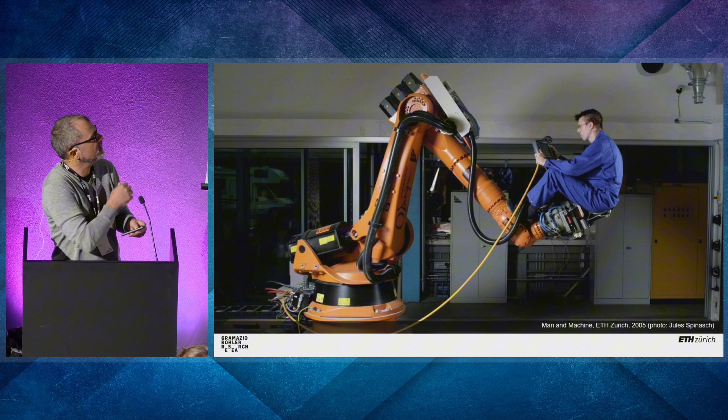Let me start with this slide. This is an artist image, a staged image by a friend of ours, Jules Spinasch. It's showing an industrial robot, so a common machine you use to produce cars, mainly, but also many other things. With a human, and the human is not just a random human, it's our first employee at ETH almost 20 years ago. The image is staged in a way that you should never show to an industry person, because this is a thing you shouldn't do.

You know, this machine on the picture is extremely blind, extremely fast, extremely big and strong and unpredictable. So this is a deadly setup. But we like the image, and we're using it over and over again because it shows a thing that is fundamental to our thinking, and it's the relationship between humans and machines. So this deeply intertwined story between two ends of producing almost everything.

So you need tools if you want to produce something. Doesn't matter how complex or how technological what you are trying to achieve is. But at the same time, this story is also extremely problematic, because often we relate to machines in general and robots specifically in a competitive way. So we see our position in the world, our revenue, our existence endangered by this other species. While this shouldn't be like this. It hasn't been like this since ever. It's a thing that came up with the Industrial Revolution.

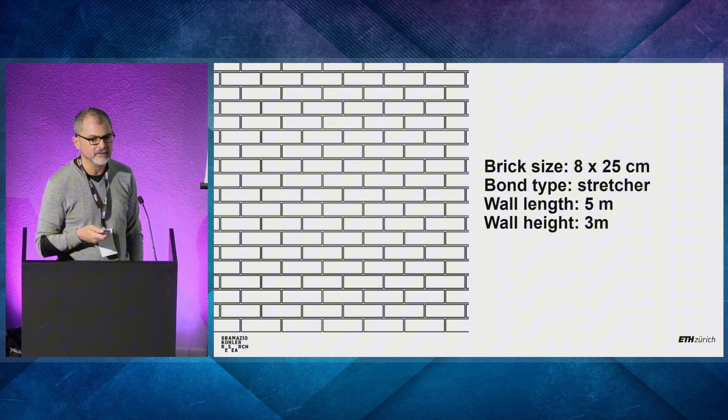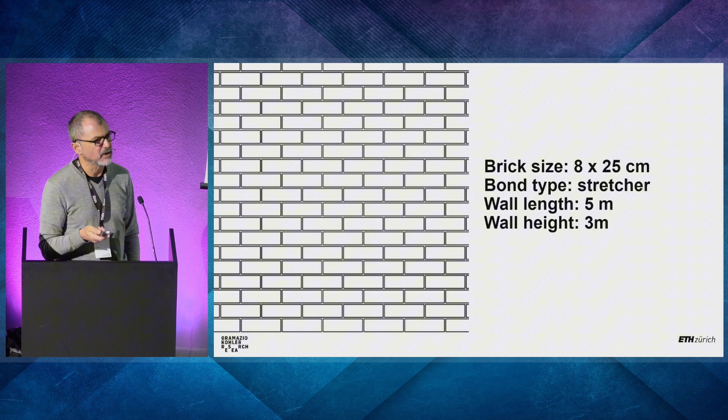It's not just a random pattern, it's a construction pattern, and it's extremely robust. So it's small, it's reduced, it's compressed, but it's robust because basically there is nothing I can do wrong. And it allows me to describe architecture with the addition of very few parameters, like the height and the length of the wall, plus the type of bond I want you to use, fixes everything.

Now, if we want a machine and not a human to build a brick wall with the same simplicity and directness, we need to describe it differently, because bond is part of a language, human language. It's a thing that a machine for sure doesn't understand. A robot for sure doesn't understand, but also ChatGPT doesn't understand what a bond is. It can extrapolate, but cannot really understand it the way we do.

But there is a notation, and this is nice with this brick stuff. A notation that is identical and belongs to the realm of machines in the same way as the term bond belongs to the realm of humans, which is just two nested loops, describing again the same way the mason would perform it, what to do. So put the brick at a certain position, then put the next brick next to the last one, go on until you have reached the end of the space or an obstacle or the length I want you to do.

And then you jump back. This is the second loop or the external loop. You move up by the height of a brick and you shift by half a brick. And this does this. Now, this is a nice symmetry, identity, but it doesn't help, because we were interested in finding out what the difference would be. So when does the system change? The system changes if we add something to this small algorithm, which is banal. It's two lines, could be less.

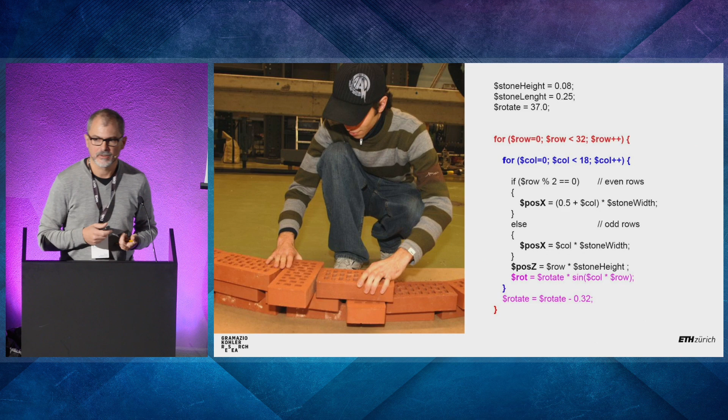We do some calculations, and now two things happen. First, there is design coming into this algorithm. Before it's not. Before it's just a convention, it's just a system. Now this person, and this only a human can do, thinks of what could I change to this constructive system? How could I manipulate it? And he decides for a rotation of these bricks. Adds these two small lines. Everything else is identical. It's just the pink stuff down there that now gets added.

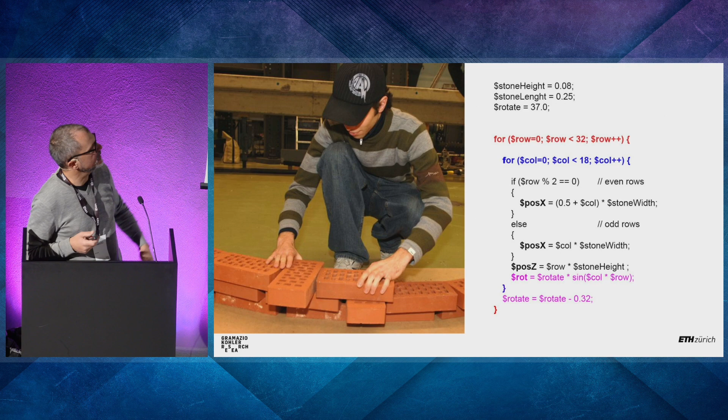And now the equation changes fundamentally, because what before was ideal for being built by a human, just the same rule repeated over and over again with the same visual reference. We are strong in putting one thing next to the other. We can be very quick, very efficient. Now, it outputs for each single brick not just the position in space, but also its rotation. And this rotation is absolutely not intuitive, because it's following an algorithm or a calculation, whatever, that is completely arbitrary. There is no way to recognize it, or to extrapolate it from the position of the last one.

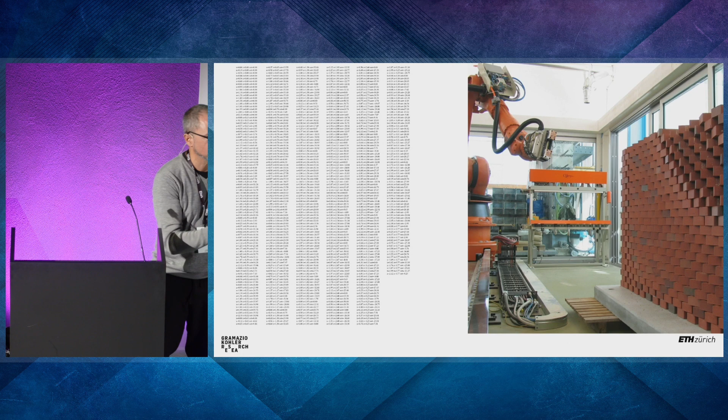And now you could say this is a very small change, but it's gigantic, because the thing that before was conceived to be built by a human now has been taken out of the domain of the human and put into the domain of the machine. At the very core of the domain of the machine, because you don't need any artificial intelligence here. It's just a controller that controls six motors that are axes. Of course, it's very high tech to have this robustly perform over years and years. But at the end, it's banal.

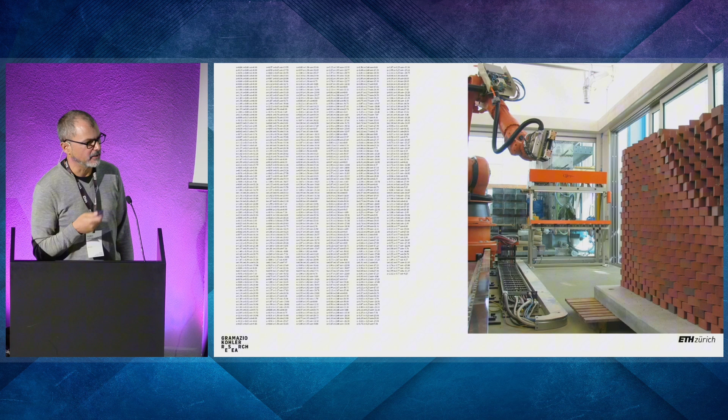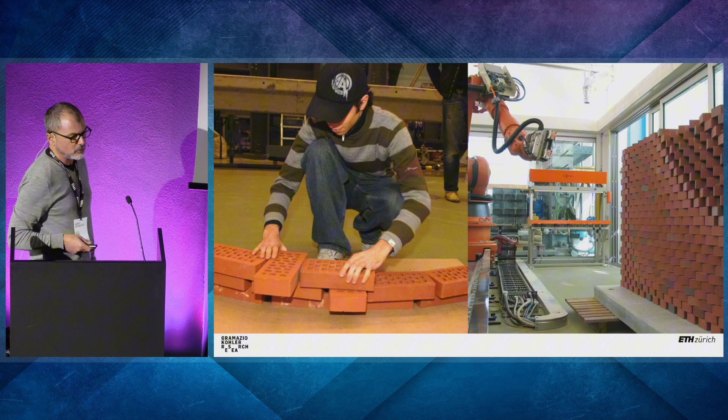But this machine has the ability to put an element in space and doesn't distinguish between simple and complex positions. So the very notion of complexity is renegotiated here. Okay, and this allows us at the end of the day, now I come to an end, to directly connect the creative act of designing, that is our human capacity, to the capacity of machines to perform complex actions in space without caring about the degree of complexity.

And this direct connection shows us two things: that suddenly this competition between the human and the machine, so that here the human is not substituting the machine, the machine is not substituting the human. They're operating in their own domain where they are strong.

Now you could say this is romantic, a bit naive. You might be right to a certain extent, but it's still worth thinking what it means, because we are doomed to interact with machines, and the longer we interact with machines, the less we are aware of it. And to understand when, in which situation, we do more. So when does 1 + 1 give 3 and not 1.5? This is very important, because it's not always obvious.

Here you see the result. This is when we probably first came up with the notion of digital materiality. That back then was a strange combination of 2 words that didn't fit together. We did it on purpose. Now, 20 years later, I sometimes read about digital materiality. I think it would be normal, an established concept. But today we will not talk about digital materiality, but more about what it does to architecture.

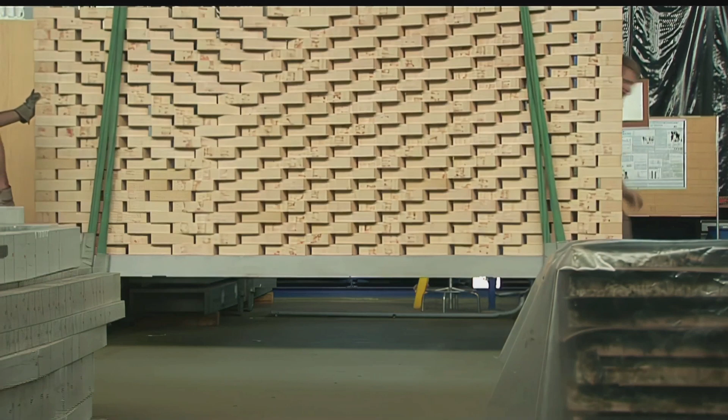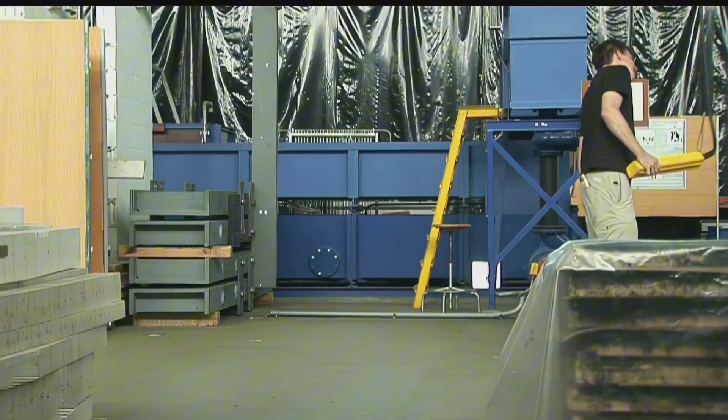So this first example allowed me to establish how we relate and think about machines, and also that this relation is part of a system. If we think of constructive systems, we stop thinking of just construction, just how parts meet in space, how we screw things together. Constructive systems are something much, much bigger that goes into questions of energy, labor, time, societal questions, who does what, when, where parts come from. And of course, machines and our ability to interact with these machines, to talk to them, and to decide who does what.

Here in this example, this was a winery we did with Andrea Deplazes as a friend, just a few months after the first experiments, where we decided to have the machine deposit the bricks and put the glue. And we're often asked, why didn't you automate the guy putting the brick on? Because we're not engineers. It might be possible, but it's not very interesting, and it wouldn't change anything in the end product.

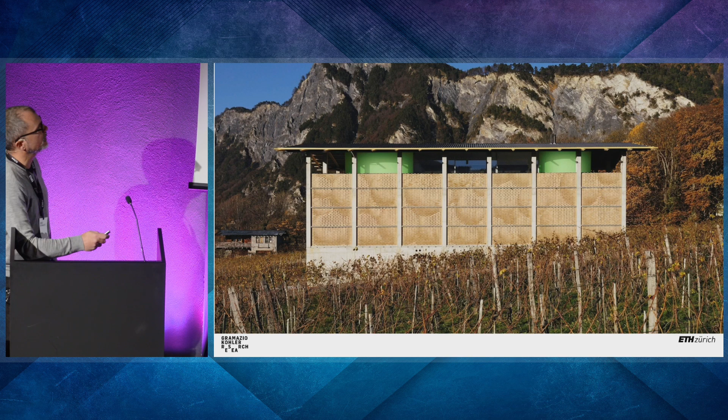Maybe I move forward here. Yeah, there you see the result. These parts are not structural. They're just screens that allow air and light to permeate. It's a winery, so that's basically what these facades should do. But they have this pattern. I cannot now explain how it was generated and the design hypothesis behind it, but I just wanted to show you how complex things become with such a simple manipulation.

You move a bit or you wait half an hour, the light condition changes, you go closer, you go inside, you're sitting and then they disappear. You couldn't say that there is one facade; there is an infinite amount of facades inscribed into this very, very simple, banal and fundamental stacking of bricks.

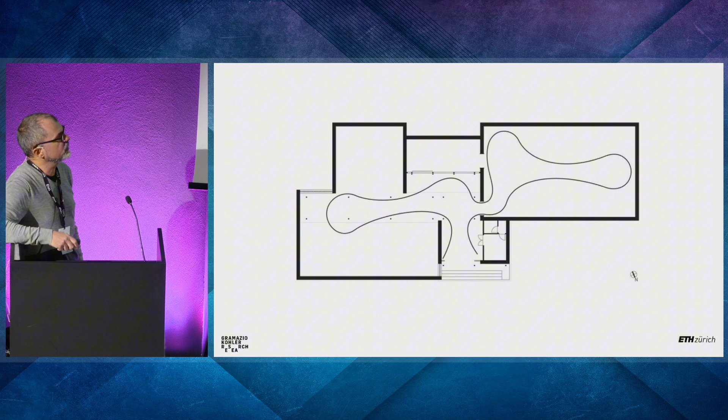Next project, this is a project I rarely show, but here it fits the constructive systems because it allows us to extend the concept of system to the design system and to this relationship between a constructive system and a design system. Here we take the robot. It's not ours, actually, we borrowed it from a company, and we brought it to the Biennale in 2008, to the Swiss pavilion. We had this machine building brick walls in front of the pavilion for a while, and then we assembled them inside to create a structure and exhibition. So basically it's exhibition design we're doing here.

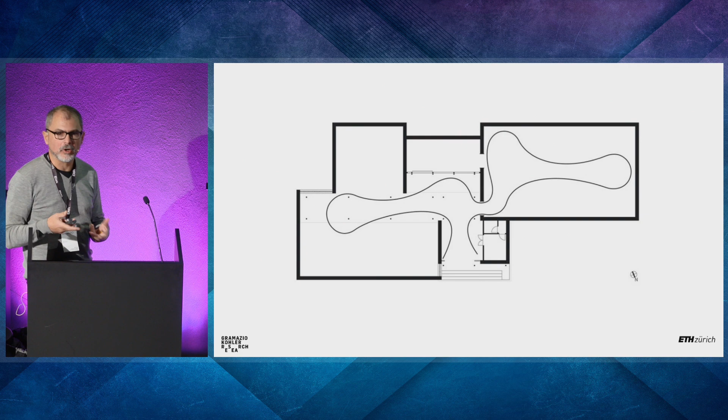And here what I want to talk about is the design approach. So we had this ability to program bricks so that the robot could then directly build them, and programmed them in a complex way, not just a stretcher bond of a few square meters, but bricks following a curve and being rotated and so on.

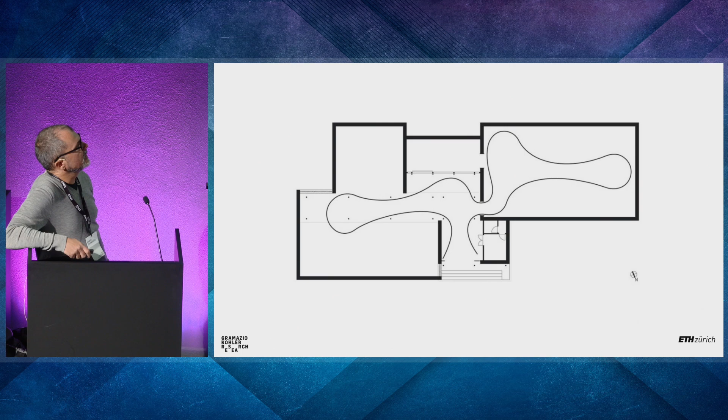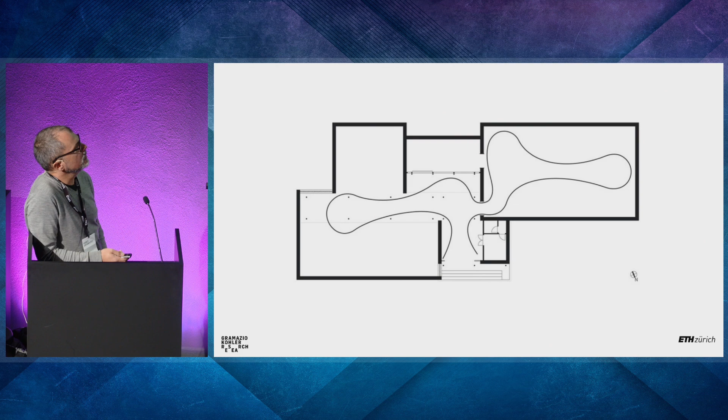And when we were asked to do this exhibition design, we decided not to design the final form, but to design a system. Because we were aware that these things need to change, to be flexible until very late, because exhibition design is like this. It's in a continuous process of transformation. So we decided to set a few rules and then to provide an algorithm.

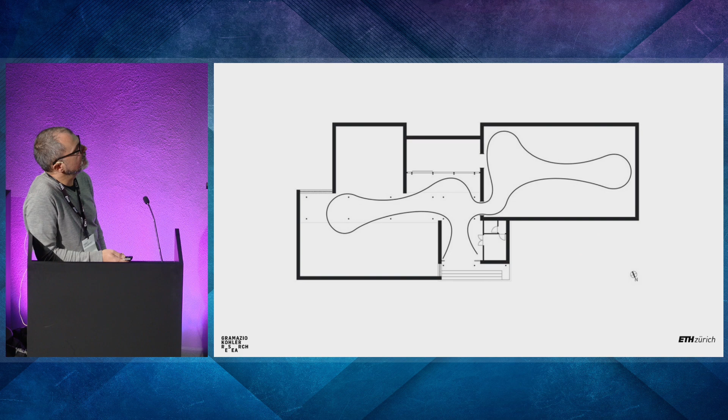The rules were we would have a wall of a certain height that we defined. It would be 100 meters long, so you could move stuff around but not make it shorter and not make it longer. So the amount of material was precisely limited. And this wall would have a behavior, and the behavior would be dictated by structure. You know, just the fact that you need to produce this wall in segments of about 3 meters, and if you don't curve the first layer, then it would just tip over.

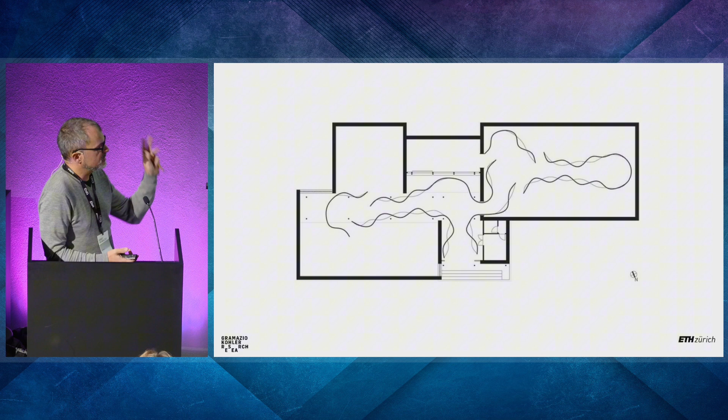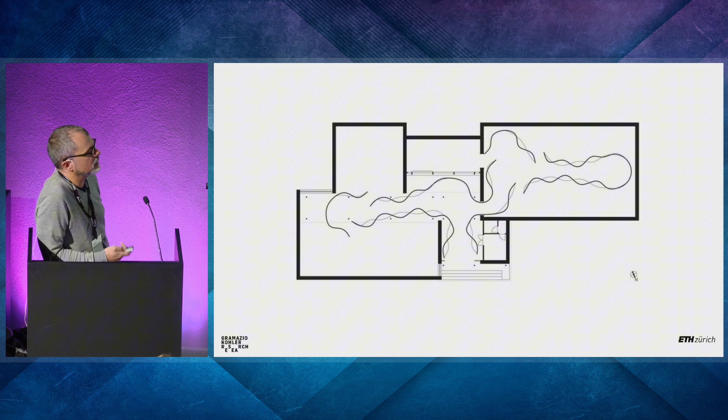And in this pavilion, or most of the pavilion, you could not drill holes and put foundations, so things have to stand. And with a certain curvature, this works. Here the black line is the first layer. So you see this thing, you move it around and it searches automatically for solutions that allow the thing to be produced. So it's, I don't know the term, in German it's Verfahrensgerechtigkeit, you know, when not just the material, but when it's the process itself that tells you how things should look at the end.

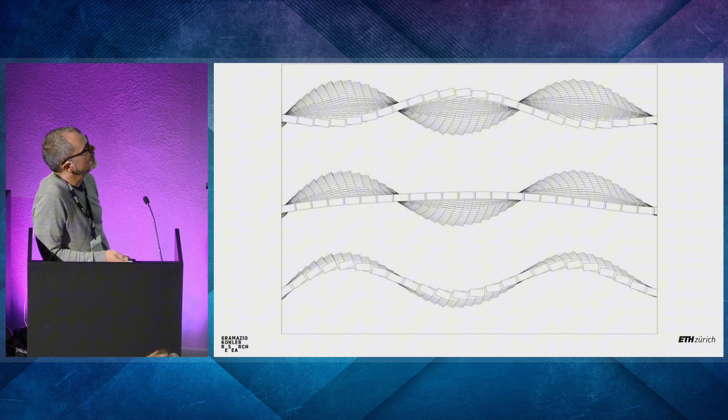And like in the other project, once you have this information, you can just ask the system to give you each single position for each single brick to make the elementation. I think that would be crazy complex. That would need weeks of manual work. Here it can be done literally in the last minute. Once you need to start producing, then the curator needs to give you the last line, and then you produce all this information, and then you are able to assemble this extremely complex, very, very thin wall directly. Good.

Another example, this is our institute building in Zurich. Here we were super lucky. This is a once in a lifetime, when the president of the school asked the faculties to design their own building. I never heard about this. Probably they wouldn't do it the second time. And inside this experiment, we designed and produced this roof here as an experiment.

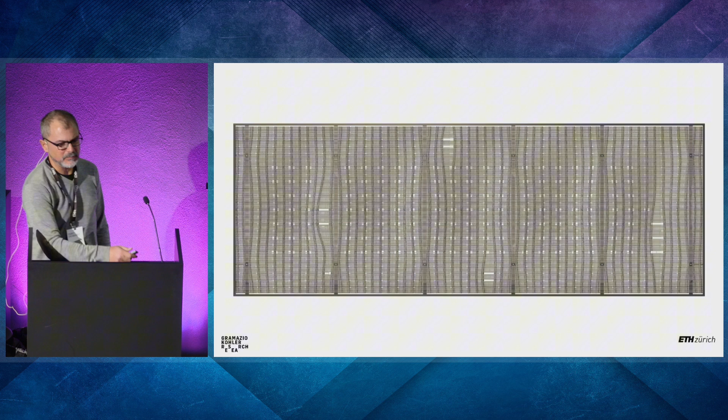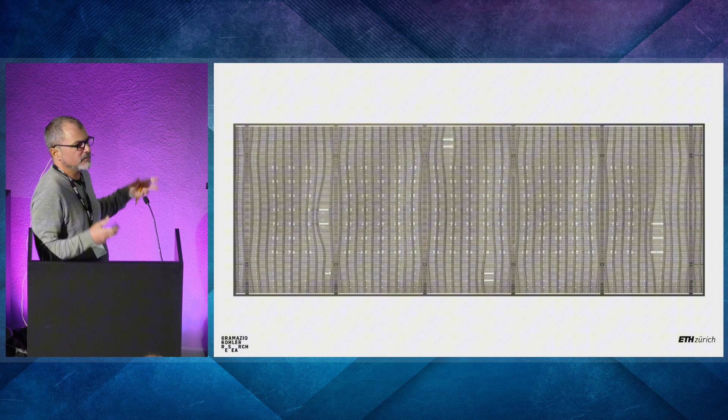The constructive system is similar to the brick experiments, similar in the sense that it's just a stacking. It's 2.5 dimensional. Different because it works with slats of timber, linear timber parts that can be processed in line. So you don't have to pre-cut them all and then find the right one to place it in the right place, but I think we'll see in a minute you do this in the process. So you have this degree of freedom to cut to a length and to cut to an angle and then to nail stuff together. And this image is nice, or plan, you could call it plan, because it's the only one existing. Everything else is data.

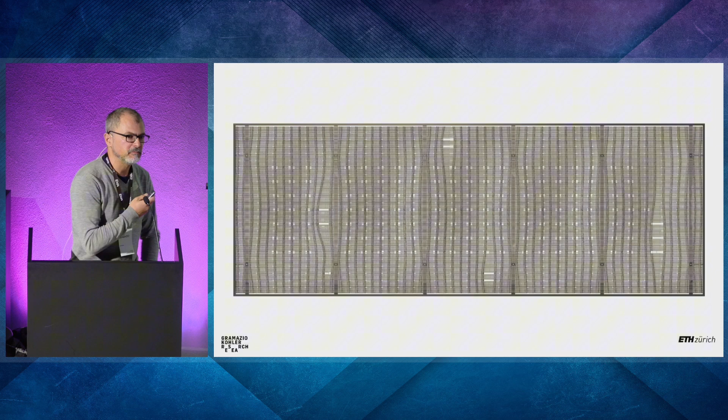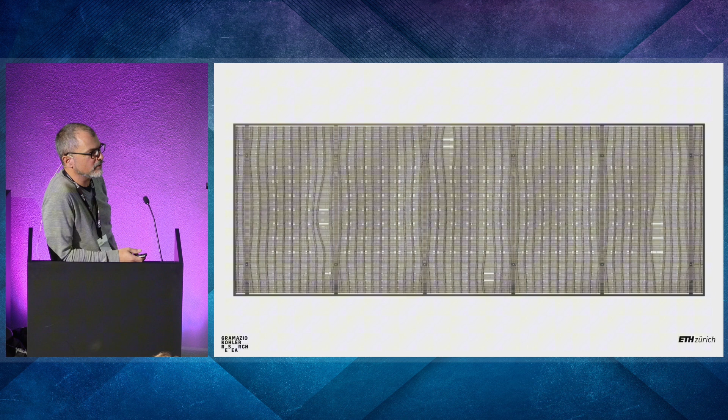It's not meant for assembly or for production, but it's meant to show a characteristic of a constructive system at this scale or of this resolution, which is that it becomes almost textile. You can stretch. You see at certain points, like here, for example, you have this opening, this smoke duct. Normally, you would cut just through your structure and then fix it somehow structurally, and then have a hanging ceiling that hides everything. And here you just ask the structure to create space for this vertical element going through.

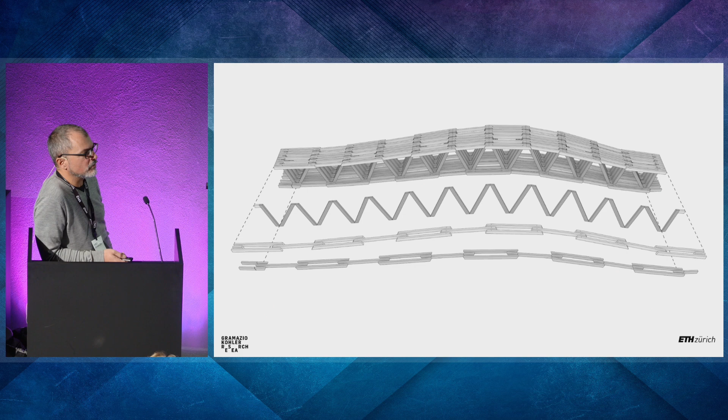The system behind is nothing new. It's just a truss, an upper chord, a lower chord, and diagonals. What is different is that these parts don't need to follow any repetitive rule, because as long as certain constraints are met, this can take any form. And the addition of such trusses creates the roof. In order to be able to do this, here I show it in a bit more explicit way, you need to design your constructive system and your design system.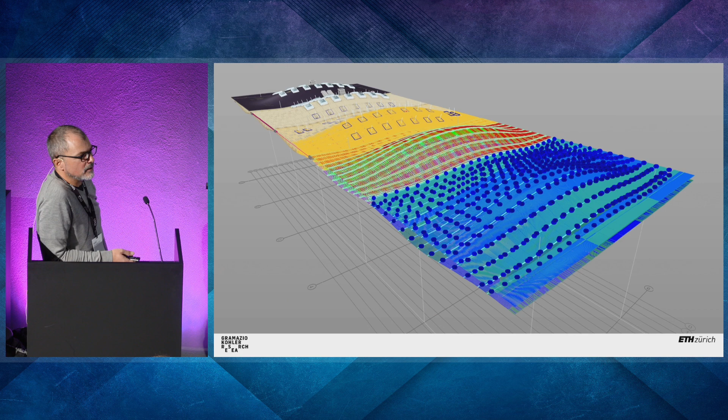So both ends are important, and they have to meet very carefully because they depend on each other. This is just a montage: here on the right bottom, you have the design information, and towards the end you have the structural information. At the end it's BIM, BIM meaning everything. But the interesting thing is, what are the interfaces we architects, who are also the designers of the system, want to be able to manipulate until the very end.

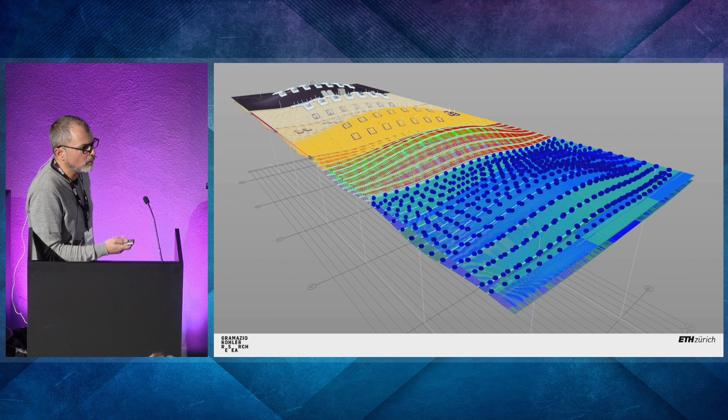So, and it doesn't matter how we design, we always need to understand what are the handles, the things we want to be able to control, because everything else then has to be automatic. This is 50,000 timber parts, all different. Almost 1 million nails, all different.

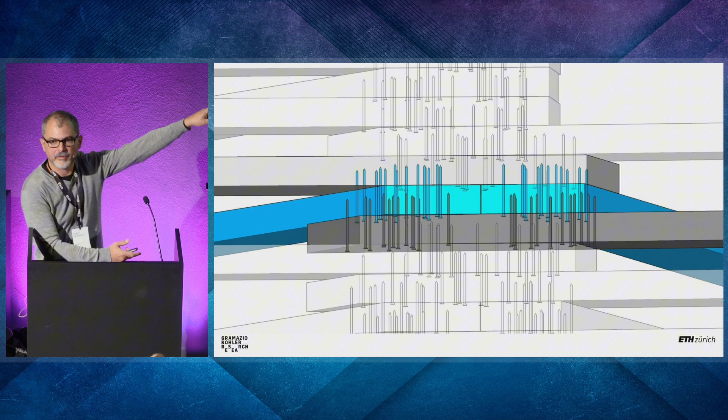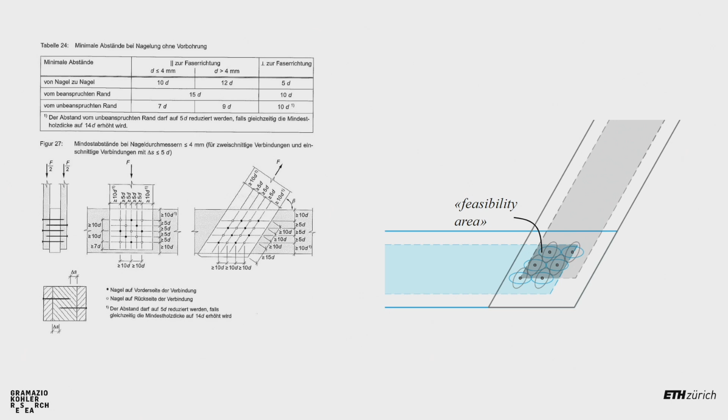And all of the nails, they're all similar, identical, but the pattern is different, because you see here it's a pretty dense thing, and you have certain rules that are dictated by timber code that you cannot negotiate and you shouldn't negotiate. And you have to find there in this feasibility area where two parts overlap the best, or let's say maybe they are often the only option to fit the nails you need, because you have this information from structural analysis, and then you start to discover in your constructive or design system certain degrees of freedom that are extremely interesting.

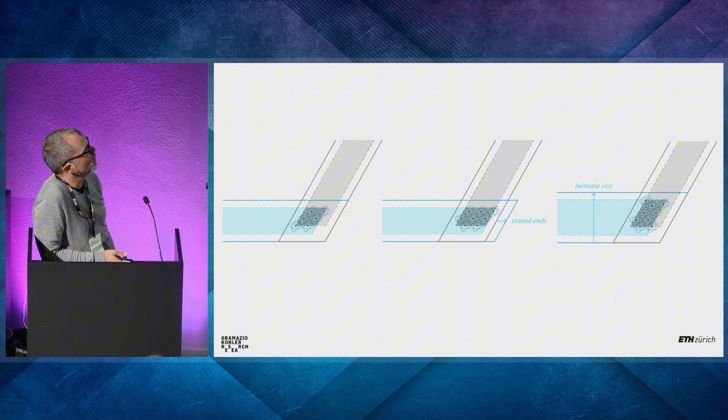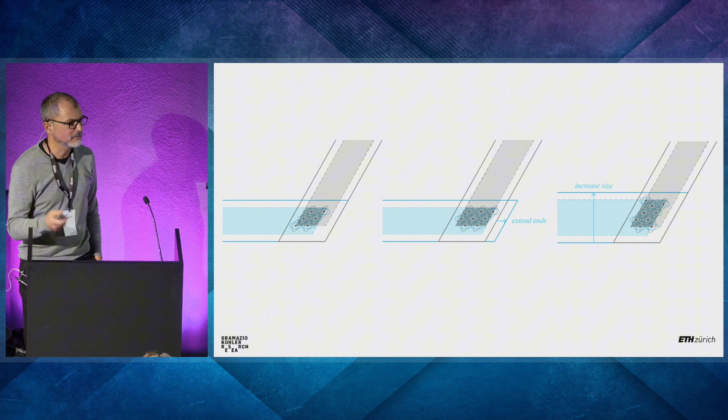So you depart from a problem. The problem being that this is 6 nails and there is no way to put the nails into these overlapping areas. But then you understand there are two ways to react. One is to extend one slat. You know, this is cheap because it comes for free. It's slightly more timber, but doesn't matter. All the rest stays identical. And this extends your area. And if this is not enough, the second thing you can do is to increase the size of the slat.

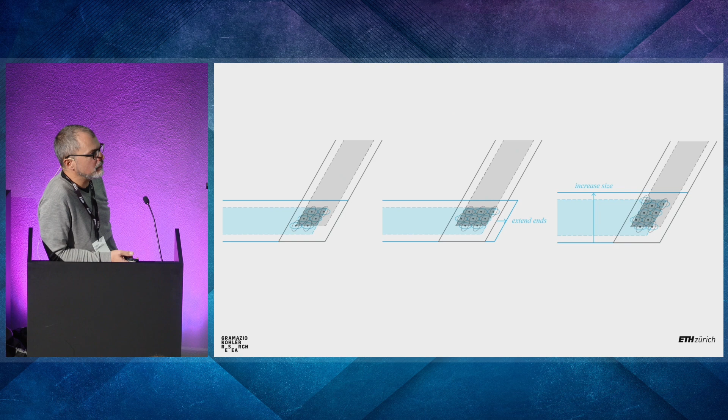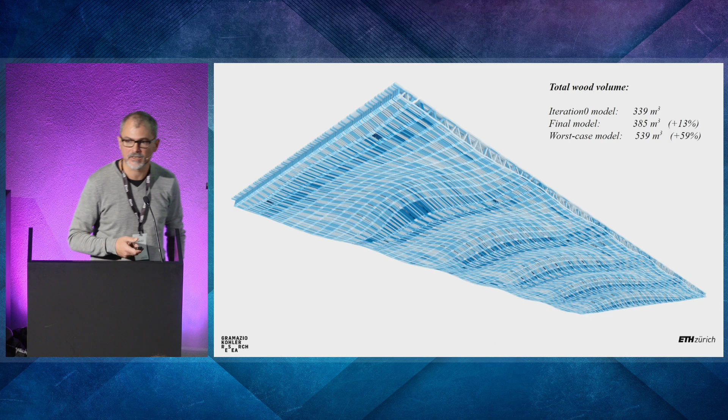And of course, this has to happen in steps because you cannot have a big number of different slats. So this becomes part of a system that then, of course, allows you to do some optimization. And optimization, you know, it's a good thing. You see there, we can save a lot by just not going for the worst case, what normally we do, because we have no idea about what's happening in our complex structures.

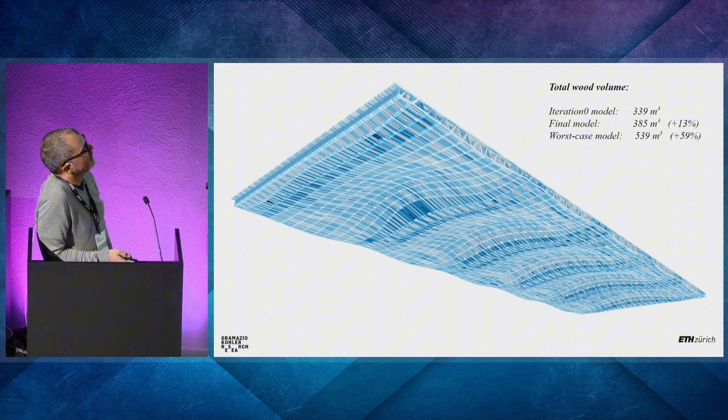Here we don't just take the worst case as a ground truth, but we say, we choose three different. Now I have skipped this slide. We just choose three different because we agree with the contractor that it is reasonable to have three different slats in the process, and then we just allocate the right one at the right place. And we'll see here.

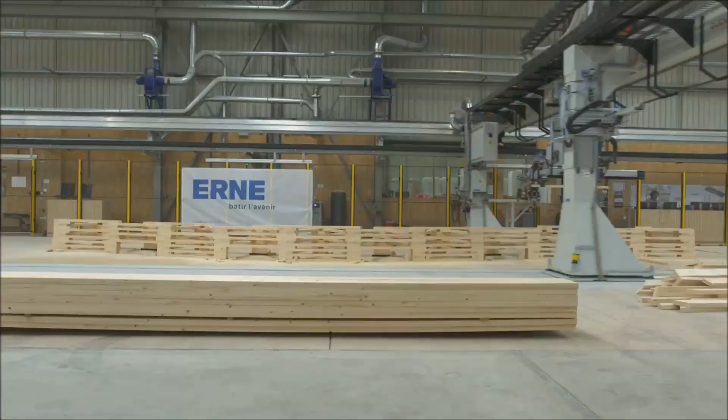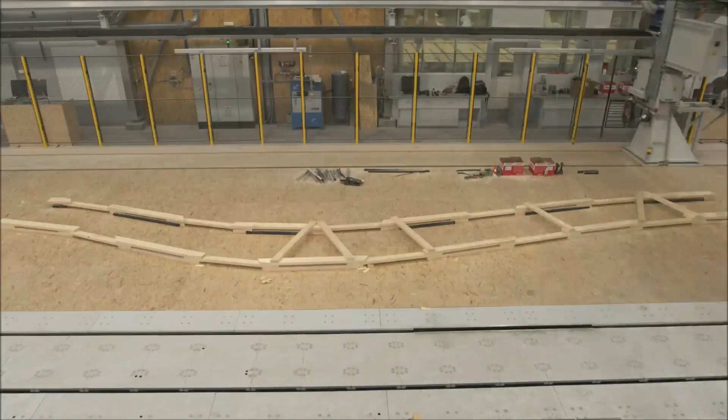Yeah. Again, the process. That is like the brick one, very, very basic, simple. Just these two cuts here are added. What is not so different, I put in the glue. It's just understanding how to rotate the blade. And then the printing process that now just is bigger than last time, but it's analogous. So it's layer by layer, and then you put the nails.

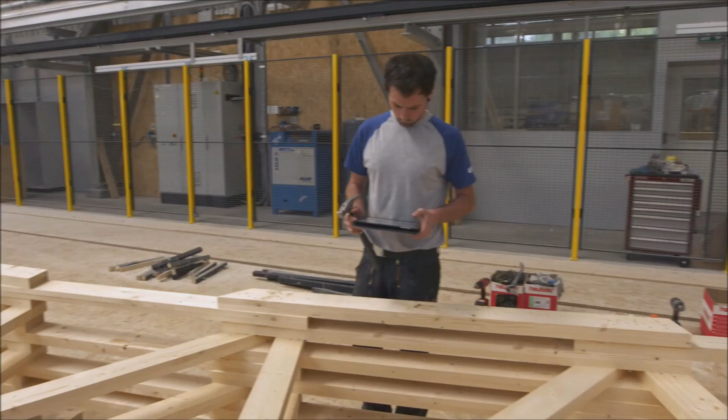And once the parts are prefabricated or assembled, you install all the subsystems. This is sprinklers and lights and stuff, and then you bring them to the building site. Yeah. Maybe I move on.

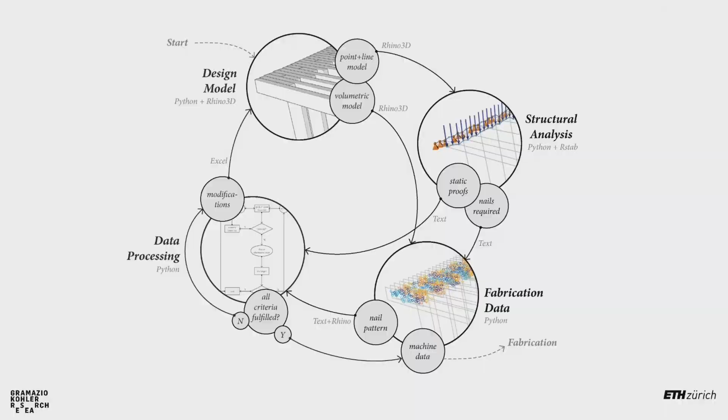This is a diagram showing what implication this way to think about constructive systems and design systems has. You need to be able to automate almost everything. Because if you deal with large amounts of data that we are not good at manipulating, then we need to be able to transmit. The design data has to go directly to the structural engineer without him needing to remodel anything, because to remodel something, if you have 50,000 parts, is a lot of time. It's prohibitive.

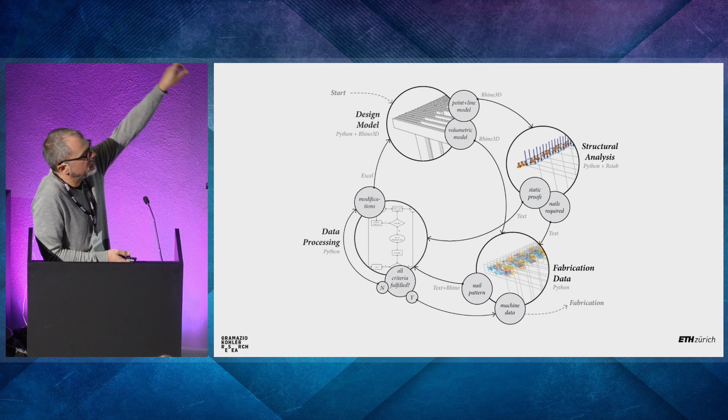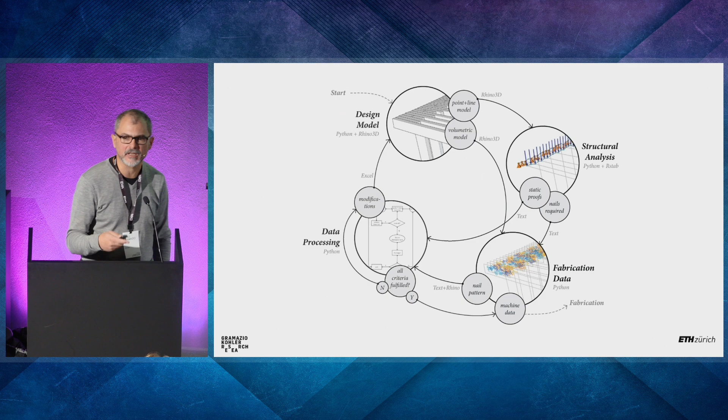The same after he has analyzed what forces you have in the joints, you automatically need to be able to check what this means for connections. So this is the story of the number of nails, and this has to give feedback to the designer. And this iteration is not a 3-time iteration, which is normally what we do in a traditional design. We change something a second time, and the third time we're already arguing with everybody, because everybody wants more money and asks us to do it right the first time. Designing is iterating. And this system gives us the ability to really iterate through things.

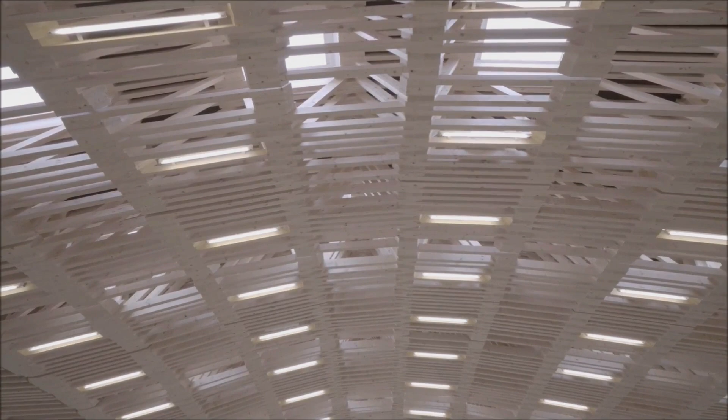And here you see the roof. You see also these seams, where things are nailed together. They look as if they were not precise, but they are super precise. They are just the consequence of this optimization step. Some of them got a bit longer. And I think this slight blurring, where this machining precision gets scrambled a bit by other logics, is extremely interesting.

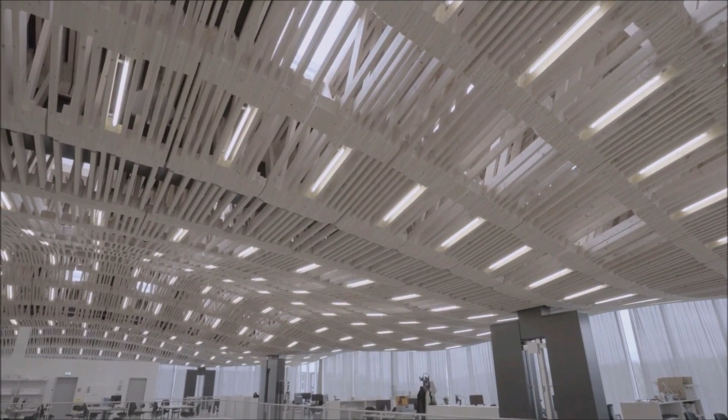You see it here. But at the end of the day, what I wanted to underline here is that we start from a system which has 50,000 parts, all different, that we could impossibly handle. And by defining a clear constructive system and design system, we can break it down machinically, both in design and in this prefabrication process, to just 168 trusses. And 168 trusses is nothing. I can print it or sketch it on an A4, bring it to the building site, and nobody will have a problem with it.

Next project. Yeah. Now I want to switch material system, but still talk about constructive system. So it's not so much the material. Here the material is also interesting or not interesting, depending.

This is polyurethane foam. This is a material that foams up, so expands its volume at the moment when you mix the two components. And we used this material a long time ago. It was a very important experiment for us, even though we didn't do anything with this material anymore. It was too complex, too difficult to work with. It was more of a conceptual

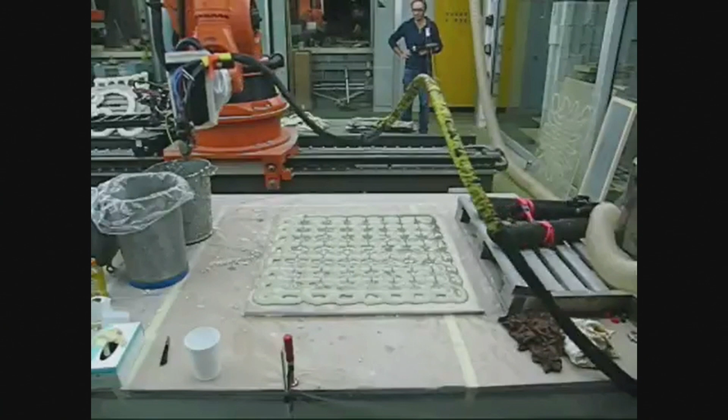eye-opener for us. Here we do nothing else than to print a path on a 1 by 1 meter panel with this material and try to understand what happens. While doing this, the material foams up. So you see here you have two processes intertwined. One is the deposition process. This runs in time, and then you have the second one that starts exactly in the moment when the material leaves the nozzle. That is also a temporal process in time, which is the foaming up. Here you see the process, and here is the result.

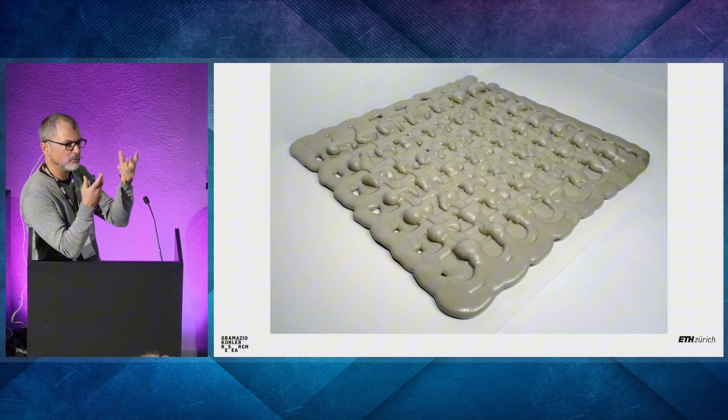And this is extremely interesting because first question is: is this beautiful? I remember discussing this with students, and they being very sort of confused because they spent a long time working on these nice patterns, and then they get this, and they need a second to adapt and to understand that actually, if not beautiful, it's remarkable what happens here. First thing is you couldn't produce this in any other way. There is no other way to produce this that fast.

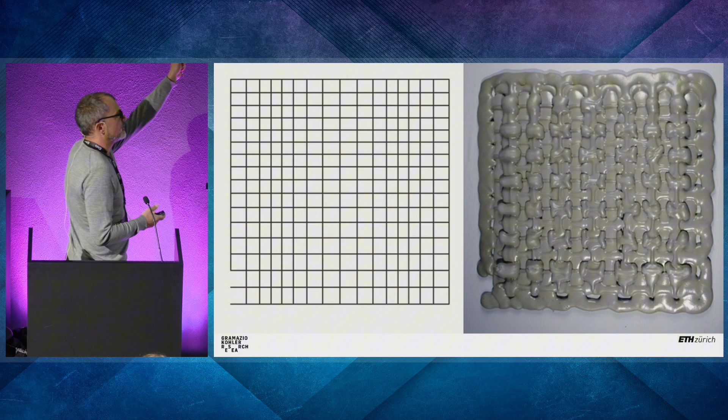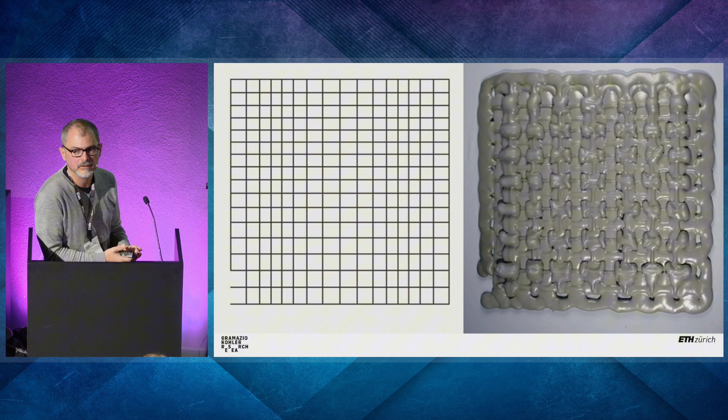And if speed, this is where we started, and energy are taken into the equation, beauty also somehow has to relate, or elegance has to relate with simplicity in production. And the second thing it tells us is we should, in general, start to reconsider this very geometric-centric way to understand design or our physical environment, where we say, okay, this is geometry, and geometry then directly is the architecture, is the city, is the material, because there are so many other processes here, like the behavior of the material, like the timing, that have much more influence on the result.

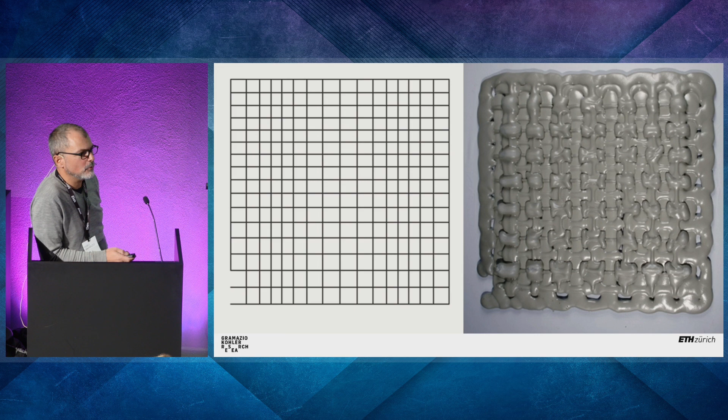And this is so simple that you wouldn't expect this to come out of it. And if you wouldn't have seen the video before, understanding the process that allows for it, you wouldn't understand. Here are other stunning examples. This is just two grids, one just shifted by half of grid. So you have the material of the second pass-through that flows down on the two sides of the already foamed up part. So this leaves this very thin trace, and most of the material flows down into the hole and foams up there. And these are very controlled ones.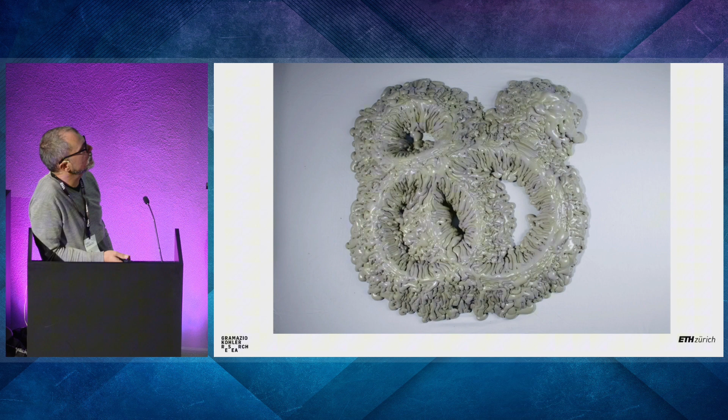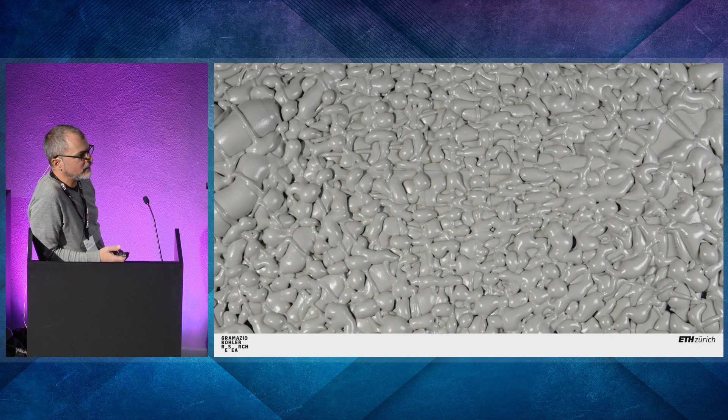This one is very much out of control, but also interesting because theoretically this stuff is technically reproducible, only theoretically, because our environment is way too complex for this to happen. So it's a small variation in temperature, in the air current and the machine and things, and you will get something different, but not so different. So there is a certain.

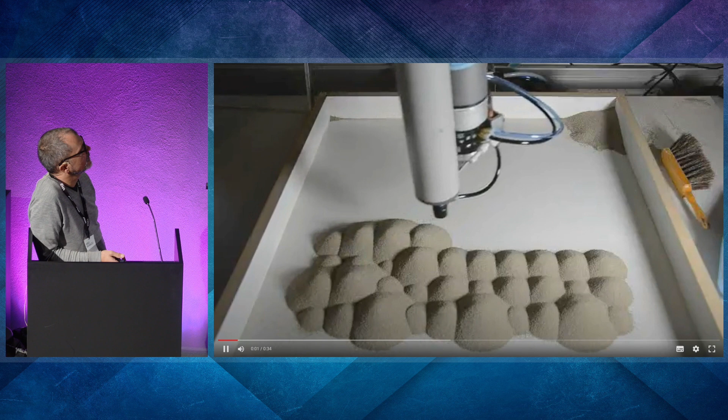Okay, we moved on very quickly to other systems that are much friendlier. This is sand. They're simpler, but also very intriguing. Frei Otto has experimented a lot with sand. This has a certain tradition. And it has, as the foam, behavior or self-aggregation behavior that contributes to a very large extent to what you have at the end. Same thing here, it's not a continuous deposition, but it's moving to certain positions and opening a valve and depositing material. And we have spent a lot of time experimenting, mainly with students, on what the relationship between time, material, and geometry, being the position in space, is. And this very ephemeral, beautiful thing.

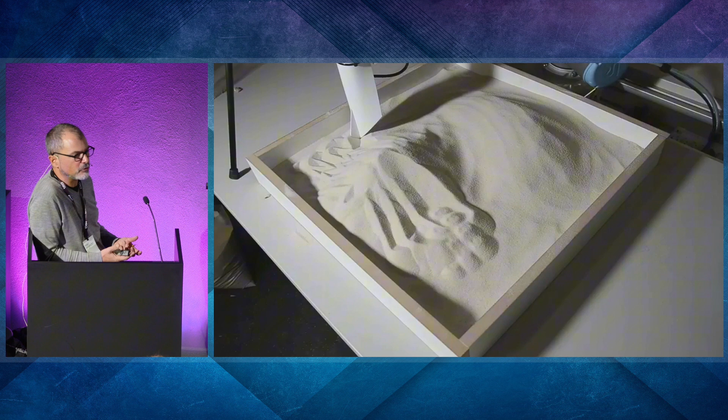Then we did an experiment at some point where we wanted to use this. This still takes too long. You see how this is a thing you would never design. This is also a matter of economy. So how can you instrumentalize things to do something for you that you would never be able to design or would never have the time to design? Which boils down to the same. Even if you would be able and don't have the time because nobody pays you, then you should find something that is smarter, where the system helps you. And then we used this to produce molds for casting concrete panels for facades. This probably we wouldn't do anymore.

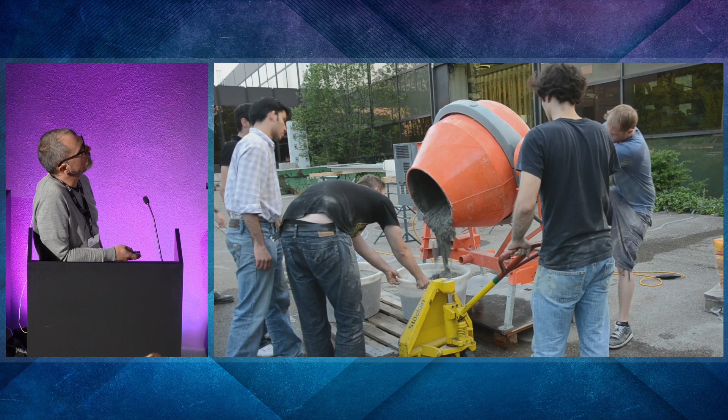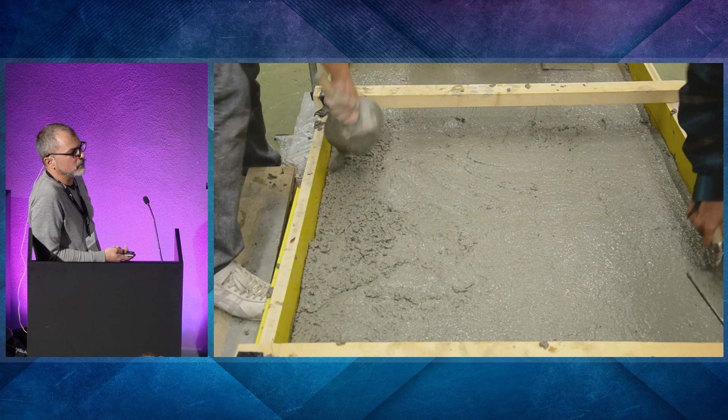This was 15 years ago. So why would you use concrete panels for facade? But back then it was a nice thing, because a lot of these things were being done, crazy shapes, crazy designs, not really clear why, and then foamed out of styrofoam, producing a lot of waste. And this was the counter proposal.

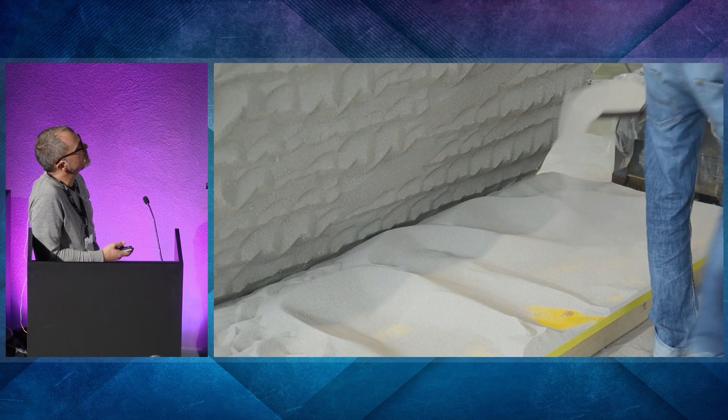This is a system that is circular, because you see the sand gets re-inputted into the system directly. This ephemeral property is then caught by the concrete. And you have a very, very thin latex skin separating these things. These were then the results. Good.

Now, do I still have time? Okay, 2 minutes. Then I rush through this one because this is nice.

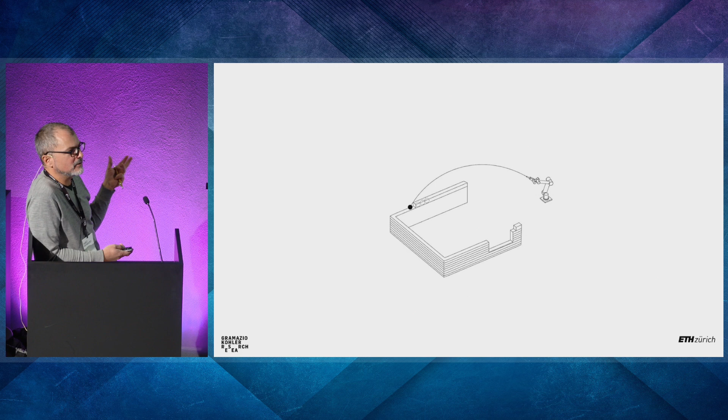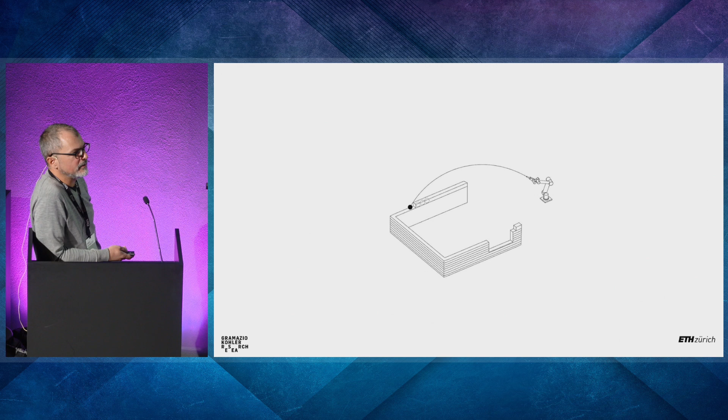You have seen we are moving from very architectural constructive systems like brick, I think there is nothing more architectural, to experimental, a bit playful things. And this is probably the most playful. Here we're questioning the 3D printer, saying a 3D printer always needs this machine that is bigger than the building itself to deposit the material. And here we go for a machine that shoots the material literally through space, and allows us to decouple the size of the machine from the size of the building.

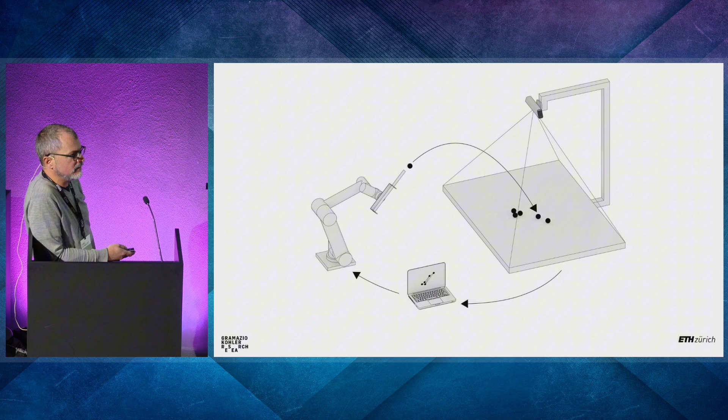Of course, it's very theoretical, but then we went. This is the strategy we often apply. We just try to see how far we get with such a thinking. You have the physics of the phenomena. They allow you to make pretty good predictions, but not to tell where things will land. In order to control the system, you need a feedback. And the feedback here in this small setup is given by a scanner. You know where the part will land, but there is the margin of error that depends, again, like in the foam, on many environmental factors. And this scanner tells the design system how to correct itself in order to be more successful.

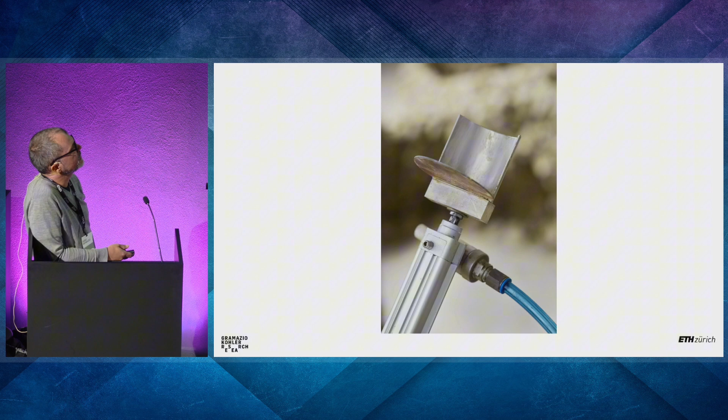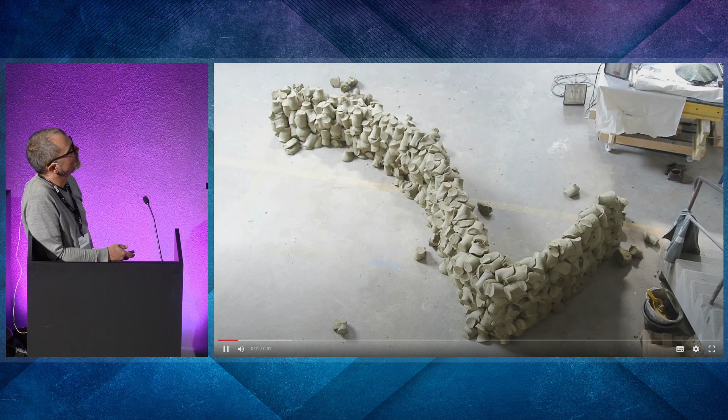And then we performed this with clay. You see here the material. We extruded the clay into cylinders. And we built a pneumatic mechanism that was able to just throw, like an arm. The small robot was too weak to do the action, so we had to decouple. What the robot does here is to orient this mechanism. You see it in this video. The charging, again, is human. Let's see. And this is the architecture.

Now, this small experiment was part of a performance. It was about demonstrating that such a very simple feedback system and design system is actually able to produce something that is architectural, something that has a vertical definition. At the same time, if you look at these images here, it has the process of its building inscribed. This is all the scan data that was produced after each cycle; everything was scanned. There you see the thing.

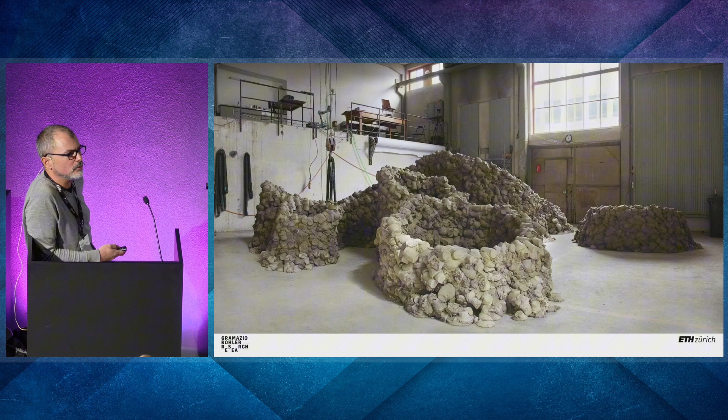And this is extremely beautiful, because here this constructive system becomes expressive. These formations still tell you, once the mechanism has been removed and nobody talks about how it was done anymore, the deformation of the cylinder speaks about the direction it came from, the velocity, the impact, the already present obstacles on the place. Okay, I think I will wrap up.

Good. Just to wrap up, I have shown you constructive systems and design systems. And my point is that as architects, we should first understand that this agency on data and the possibility to really design and shape with these complex systems is important, because it allows us to create efficient structures, and also beautiful structures in a very efficient way.